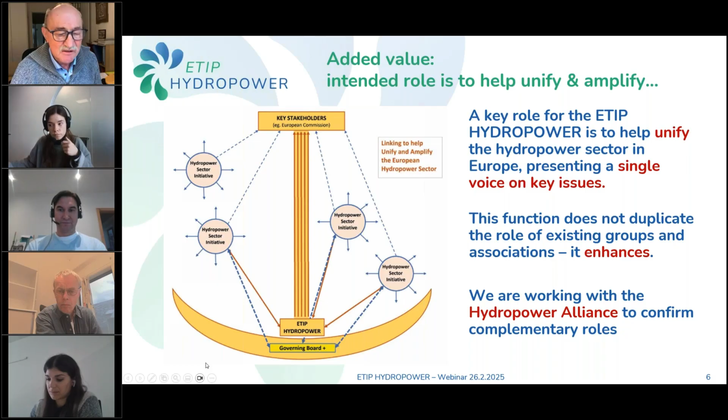ETIP Hydropower has been active for almost 2 years. We have an operational structure in place, the secretariat, an industry-driven governance with all stakeholder sectors, and a widely open scientific advisory board with 26 members. You can see some names here.

I am chairing, or coordinating the project from the scientific point of view. We have a governing board chair, Denis Aelbrecht, and governing board co-chairs Antonella Frigerio and Peter Stettner. I think perhaps some of them are online with us today.

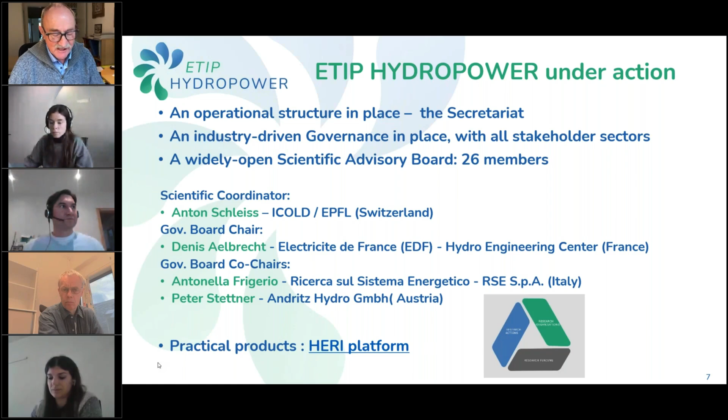We have established the so-called HERI platform, which gives information on ongoing and already finished projects at the European level, but also at the national level. The structure of this platform is ready, and you can see it on our website. We are still working to gather much more information than we already have, convincing more people involved in projects at the national level to share information about their work.

We have 4 working groups, and we are very satisfied with the huge motivation of many people to participate. One group focuses on hydropower's role for flexibility and storage, a second on hydropower and biodiversity, a third on hydropower and climate change, and a cross-sectorial working group which wants to promote and disseminate uptake of past and current European R&I projects, which is the purpose of this webinar today.

First results of these working groups will be presented during our Hydropower Day on 8th of April, which I will show you on a slide at the end.

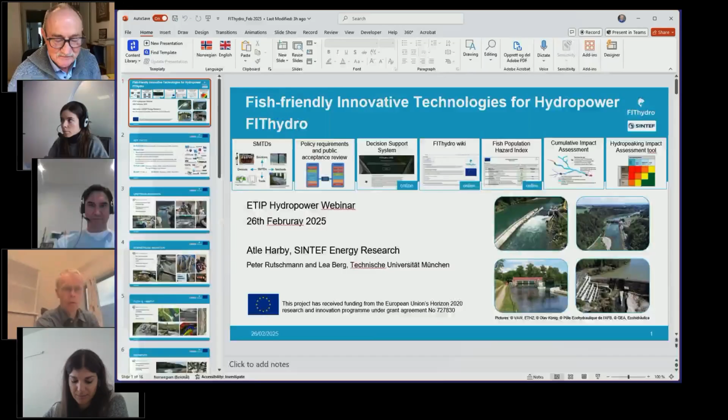Thank you very much. Let me see if I can present. I think so. I'll just share a window. Yes, sorry, okay. Are you seeing my slides now? Yes, we see them.

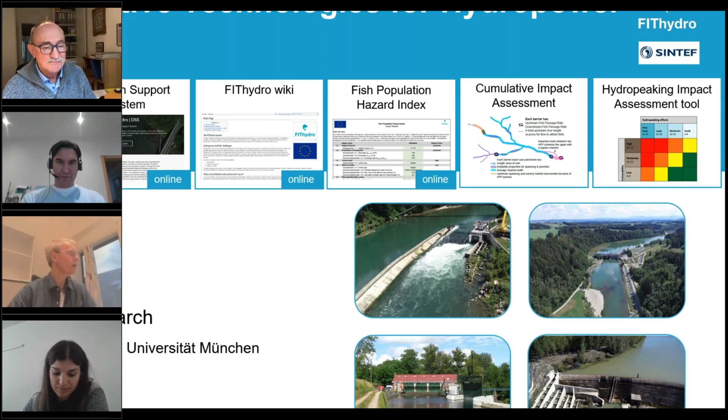Okay, thank you. I will present the FIThydro project, an abbreviation for fish-friendly innovative technologies for hydropower. I'll go briefly through some of the key elements, findings, and results, which are now widely used. We had 26 partners, half from research and half from industry, representing 10 countries. The goal of FIThydro was to develop cost-efficient environmental solutions for hydropower while maintaining or even improving hydropower generation, trying to improve both environmental conditions and generation. We presented many decision support tools and what we call solutions, methods, tools, and devices. We had test cases around Europe in several countries to apply and test these innovative solutions. The budget was about 7.2 million euros, plus at least 20% extra as own funding among partners. The project was supposed to end during the COVID period in late 2020. We hoped to have a final seminar in person, but that was quite difficult in 2020 and 2021, so we ended up with a webinar as the final solution. But there's a lot left from FIThydro, which I'm going to show you now.

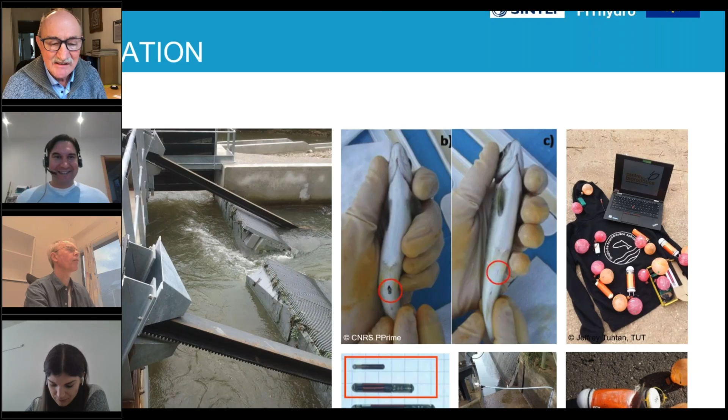I don't see what you see, I just see my screen. For me it's actually the same. If you can zoom out the presentation a bit, perhaps put full screen or go out and put full screen again. What about now? Now it's perfect, so we can see all the fish. That's important.

We used to use GoToMeeting and GoToWebinar all the time during FIThydro. It was a very good tool, so I was used to it then, but since then we only use Teams, so I'm sorry if I'm unfamiliar with how to use it.

This one you need not see perhaps, but I'll skip that one anyway, I told you about it. I think that's okay, we saw the important part. It's perfect. And this one you see the full screen from a little photo of an entrance to a fish ladder in the lower end. Yeah, good, okay.

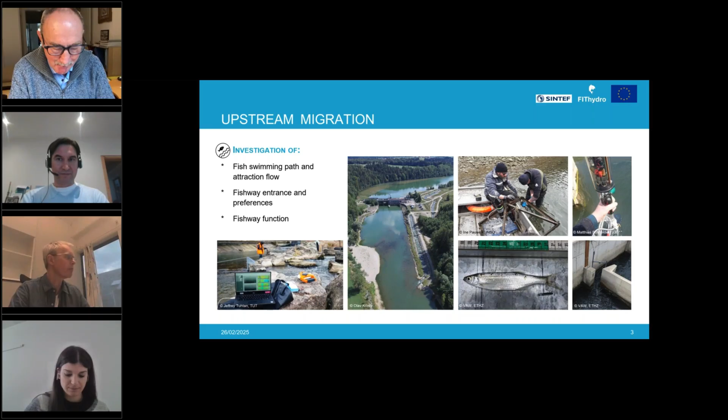So it's going to be some photos of what we did, and you also see some devices here and people mounting things to track fish and so on, to actually look into the challenges of making sure that fish can pass upstream and also downstream, which is maybe even more difficult because most of the flow has to go into the turbines, and we have to get the fish to go somewhere else.

To not be chopped up, so to say, inside the turbines. So I'll come back to some of the devices we developed to do this, but we had a look at guidance efficiency and attraction to the bypass, and also looked into what would happen to fish if they actually pass through the turbines.

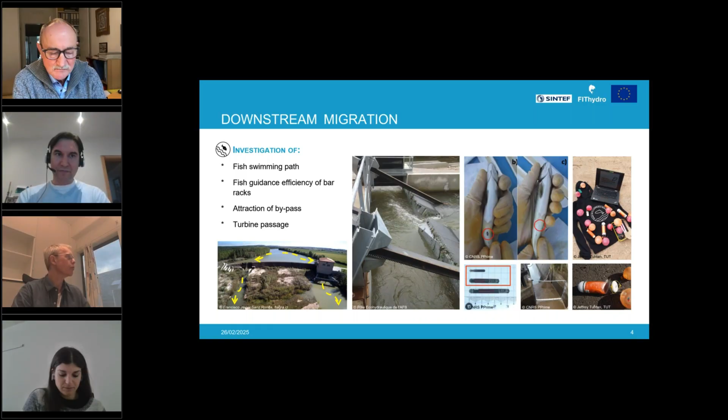Other challenges with hydropower and fish is, of course, that we modify the flow and hence impact their habitats, both all kinds of habitat for spawning, for rearing, for adult fish, and how it's distributed, and how much water we deliver to the bypass reaches of hydropower impacted rivers are quite crucial.

So we did both modeling and also field work to actually test spawning gravel, or to see how habitat conditions change with flow. We also had a special focus on hydropeaking, I'll come back to that as well.

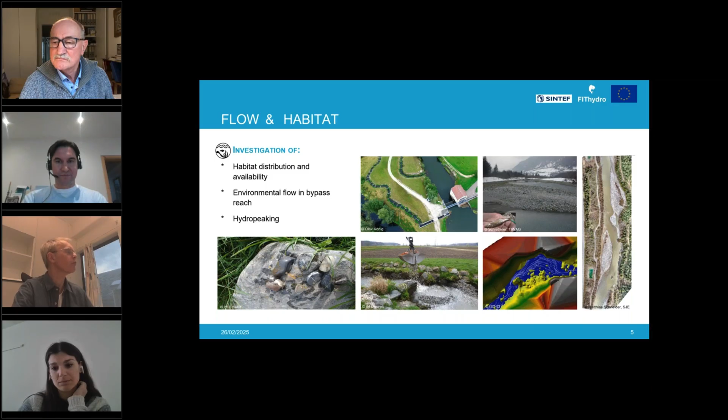We also had a little bit of focus on sediments, because we all know that dams also stop sediments and block it, which will eventually have a large impact on the downstream river and downstream fish habitats, maybe changing the substrate conditions and so on.

So we also looked at solutions to make sure that the geomorphological processes keep on going as they should be. Okay, that was a little overview of the main challenges with fish and hydropower.

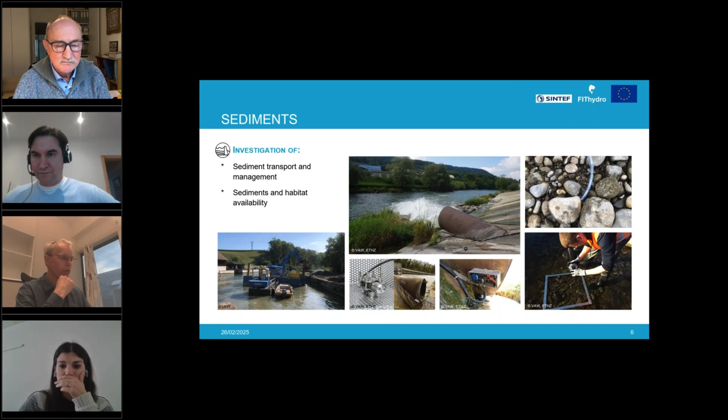And I'll explain some of the tools and methods we actually developed in FIThydro. You see here a long list of solutions, methods, tools, and devices that can help investigate how the conditions are at hydropower plants and look for solutions.

I'm not going to explain all of them because that would take too long, but you can read about all of them in the FIThydro wiki, which is still working. It's an open access online platform. It's not really a wiki in that everybody can edit it, but those who were members of FIThydro could. We have divided this wiki into the main challenges, like I showed you just now, on habitat and e-flows, upstream and downstream migration, and sediment.

So you can enter the wiki in many ways. If you have a challenge or think you have a problem, you will find the tools and methods you can use to investigate, find out the problem, and solve it with mitigation measures. It's a systematic built-up wiki or web page where you can find a little bit of information, and if you click further down you'll find more, and you can link to references and hopefully even find the contact persons that actually developed the tools or took care of them.

These will help in the whole phase of hydropower development and planning, implementing, maintaining, and monitoring these measures to see their success rate and so on. And all of these solutions, methods, tools, and devices were tested in different test cases of FIThydro. Some of them were also in a prototype status before we started FIThydro, and some have even been developed a little bit further after FIThydro, but they are live solutions.

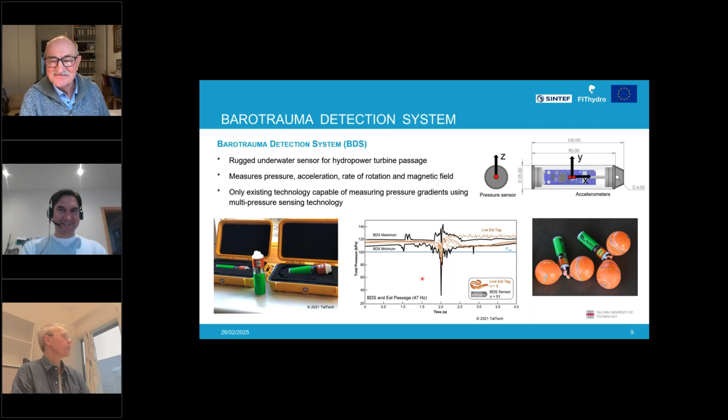Another thing we did was through a lot of laboratory studies, we developed this curved bar rack bypass system. It was developed by ETH, and it provides better solutions to guide fish to the right bypass instead of getting them into the turbine, with better efficiency on the fish and with less head loss. That was kind of the main advantage with this system, and we actually proved that it has 4 times lower head loss compared to the normal shape.

The normal shape of the bar rack in front of turbine intakes, and it has been tested with different fish species as well. So it's quite impressive performance and suggested to be used. I think it's now installed somewhere.

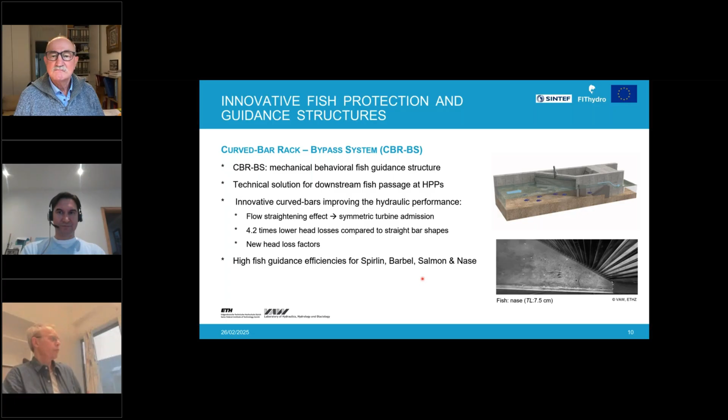We had from beforehand a lot of focus in several countries and national projects on hydro peaking impacts from power plants that are turned on and off, leading to rapid changes of flow in the downstream river. So we developed a framework, which we call the hydro peaking impact assessment tool, which can use either flow records or synthetic flow records, field measurements, or modeling to describe the physical conditions, and hopefully also fish population data that can tell you how vulnerable the fish population is.

This tool investigates rate of change, ratio, frequency, and timing of water level and flow fluctuations, and also the changes in habitats, to give you, combined with the vulnerability of the fish populations, a score on the impact, like you see on the right-hand side here, where you combine the effect of the peaking and the vulnerability of the fish.

And the goal of this is, of course, to try to do things that move you from the upper red left corner down to the green corner, where hydro peaking would have a very, very small impact.

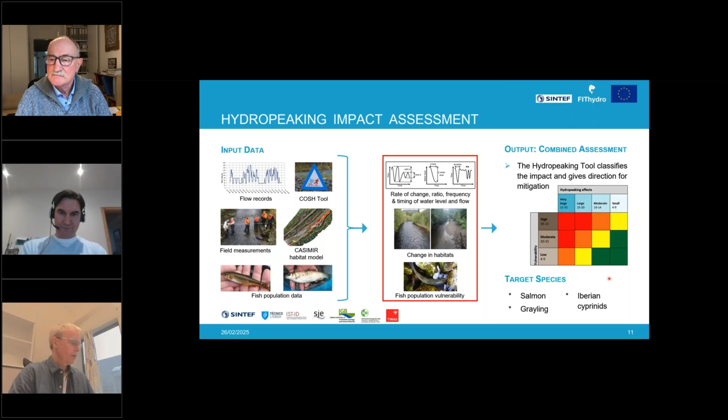We also made several decision support systems, or systems to help make decisions. It's kind of a screening tool, evidence-based decision-making to find the mitigation measures and first of all the impacts on fish. It's a screening tool on a more high level to find out what are the potential risks and how to make decisions on what to focus on to improve conditions.

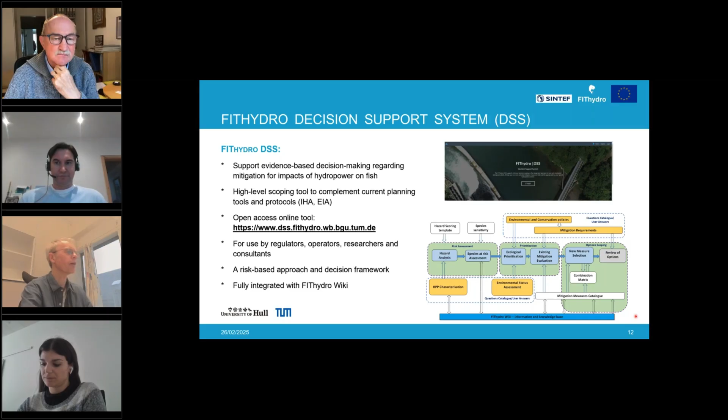So it's an online tool that is still alive. From the diagram, I'm not going to explain it all, but it has several inputs, mostly from research done in FIThydro, to find your way. It's also linked to the FIThydro wiki, so you can really find what the tools and mitigation measures should be if you have this or that problem.

Another tool, which is a bit similar but simpler, addresses fish hazard and risks of turbine passage, upstream and downstream migration, and flow alteration that may impact fish. It gives you a risk score, and if it's a high risk score for fish species that are very sensitive, as shown on this graph, combined with high hazard, it shows where you should perhaps do more investigation to solve these problems.

The input data you need are some specifications on the power plant, flow measurements, flow statistics, and information on where fish can move downstream and upstream, the facilities involved, and of course some fish data.

This is developed as an Excel tool, which is available for anyone, and it gives you a score shown with green and red indicators. For each fish species you'll see green, red, or yellow indications, and you should go look more into the red ones. That's where you can focus your mitigation measures.

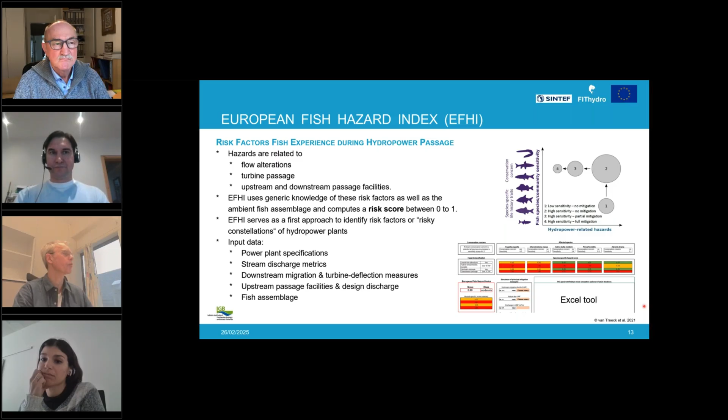We did not only look into technical things, we also looked at social acceptance of hydropower and policy requirements. We did a survey and review of national policies in several countries. This was quite fresh in 2020, and there may have been changes since then, with things happening fast like the Renewables Directive, the EU taxonomy, and nature protection efforts in Europe. Still, we did work looking into not only the Water Framework Directive but also other national policy requirements.

So I'm soon about to wrap up. The idea with FIThydro was to provide solutions, methods, tools, devices, policy requirements, and effective tools that can be used for planning and design to make hydropower more socially acceptable and environmentally sustainable. I think making these tools available also makes it necessary to do some training or adaptations in each country.

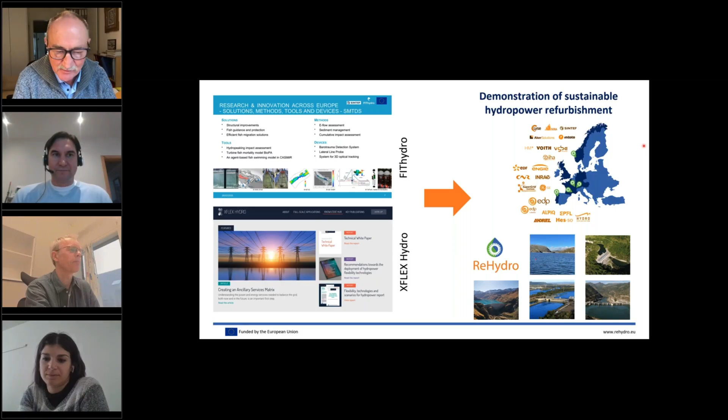So I remember very well, just before the lockdown, there was a workshop you organized on the wiki of FIThydro, January 2020. I think that was the last time I traveled before the lockdown started. So I remember very well the FIThydro project because of that workshop, which was very successful at that time.

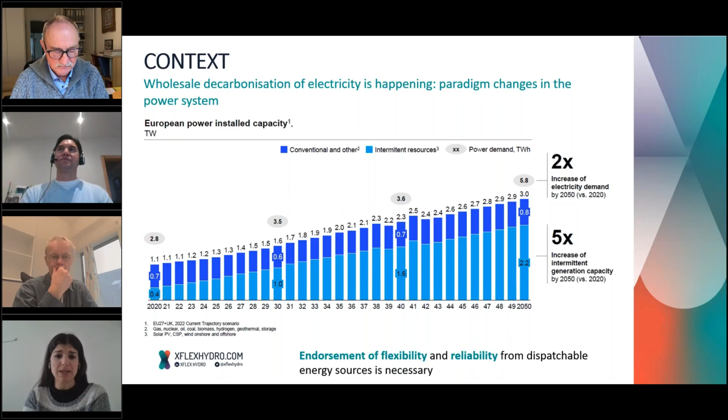There is also an expected increase of intermittent generation capacity, namely from wind and solar, to meet renewable energy targets, 5 times higher in 2050 relative to 2020. In this context, there is a strong need to endorse flexibility and reliability of controllable sources such as hydropower, which can provide energy flexibility and power flexibility to the grid, ancillary services, and storage capability for long-term flexibility.

In this context, our X-Flex Hydro project targets innovation and demonstration activities over 4.5 years, in order to develop new technologies and integrate them into existing and new hydropower stations, to demonstrate that it is possible to strengthen hydropower flexibility while keeping reliability of the technology. X-Flex Hydro gathered together 17 partners from both academia and industry to develop innovations, demonstrations, and deployments of those solutions.

These are the main steps of our project, started in 2019 and concluded in February 2024: first, drawing what are the flexibility requirements and capability of hydropower; then understanding how smart solutions, targeting for instance digital tools, can improve hydropower flexibility, shown in 6 demonstrations across different kinds of hydropower stations worldwide—pump storage, reservoir storage, and run-of-river power plants; and finally, how to deploy those results, drawing roadmaps and guidelines, and analyzing market uptake potential and dissemination.

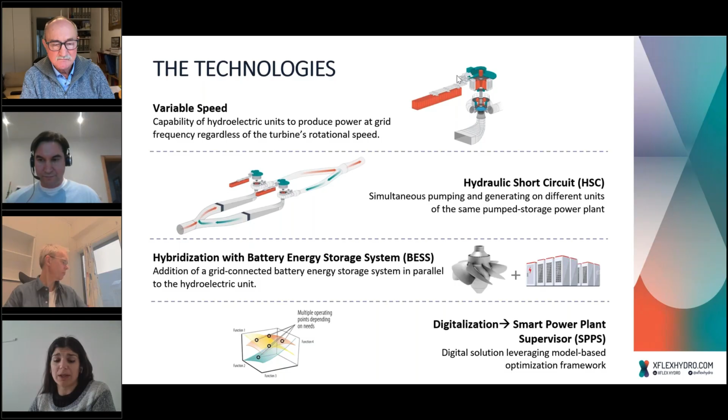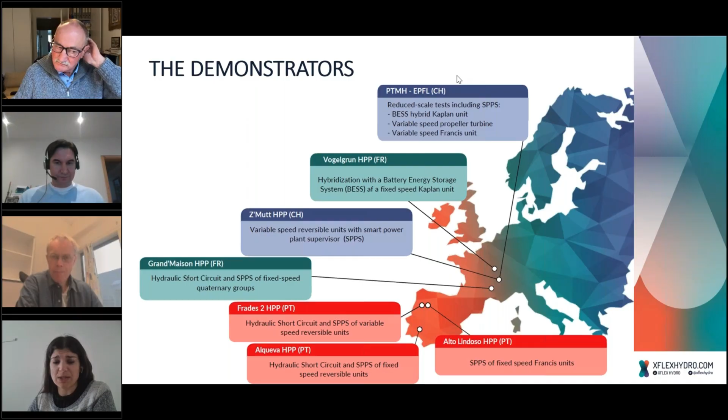These solutions, depending on the specific case study, were demonstrated in 6 demonstrations, plus in our laboratory at EPFL, at the technology platform for hydraulic machines, where we had 1 test rig for preparing and fine-tuning those technologies before full demonstration at the plant.

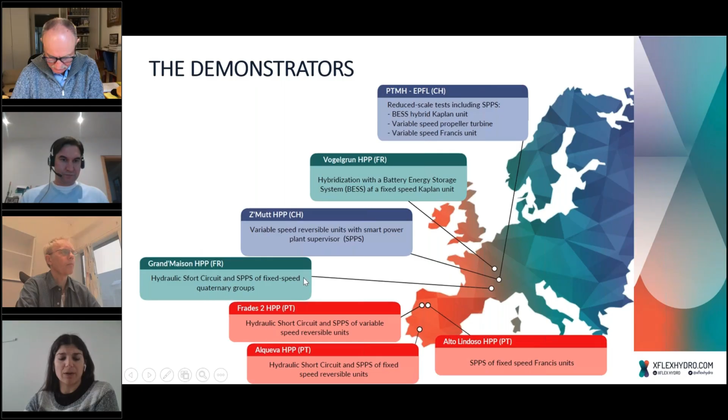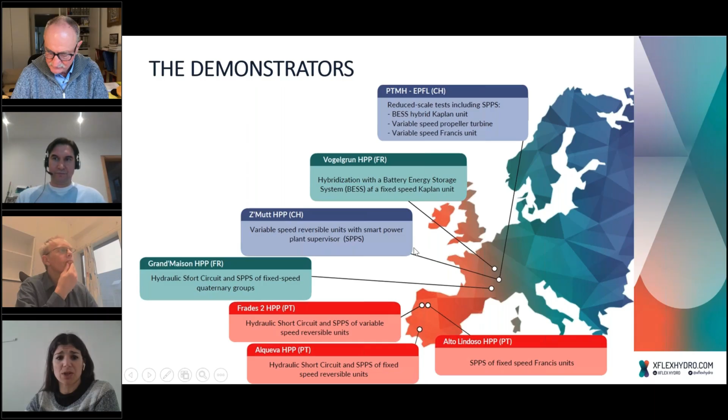We had 3 demonstrations in Portugal: a storage hydropower station and 2 pump storage power plants featuring reversible pump turbines. 2 demonstrations in France: Grand Maison, a pump storage power station with Pelton units and reversible pump turbines forming quaternary groups; and Vogelgrün, a run-of-river plant with Kaplan units and a battery, now in operation. And 1 demonstration in Switzerland: Z'Mutt, with reversible pump turbines and full-size frequency converter capabilities.

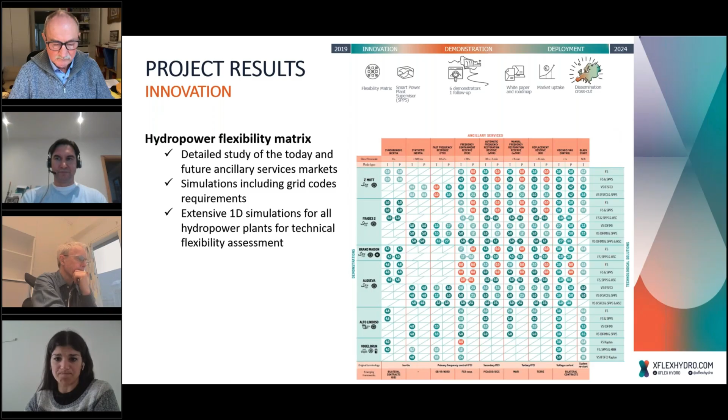The other major result was the development of a digital tool, the Smart Power Plant Supervisor, that was successfully installed in all demonstrators. This is an optimization tool that allows the use of meta models built on simulations, numerical simulations, and experimental tests at both reduced scale and full scale, in order to define a health index and optimize operations of units based on real-time evaluation of that health index.

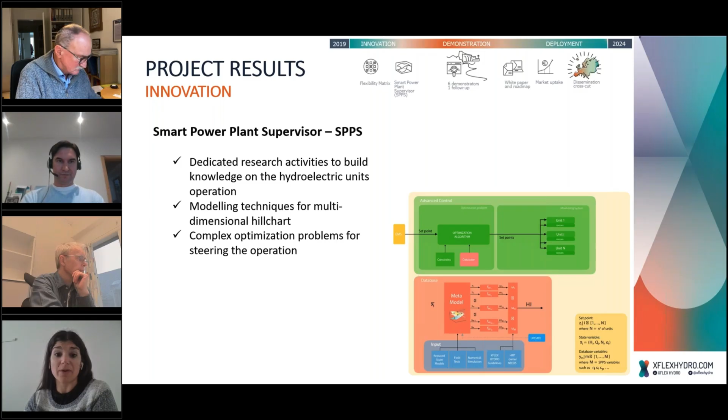Both modeling techniques and optimization algorithms have been published, so they are open source, and each manufacturer has developed their own proprietary solutions to be exploited on the specific demonstrations. This also led to commercialization of the project results.

Going to the demonstration, first for pump storage power stations implementing hydraulic short circuit, this was demonstrated in Alqueva, Grand Maison, and Frades. We have three different demonstrations because each one has features and particular capabilities. For instance, Frades was particularly interesting to study how variable speed with a full-size frequency converter plus a hydraulic short circuit could achieve a full extension from negative power to positive power and vice versa without stopping operation.

Also by performing fast changes in modes, so for instance we achieved to demonstrate that it's possible to change and switch from pump to turbine mode in only 70 seconds for a machine of several hundred megawatts.

In Grand Maison, we had Pelton plus reversible pump turbines, so quaternary groups. Here also, thanks to the hydraulic short circuit and fixed speed machine, we were able to significantly raise the capability of regulating and pumping mode into these power plants. Here, for instance, you can see the operation since September 2021, when this was put into commissioning, and the extension of the operating range was reached in the first 6 months of operation.

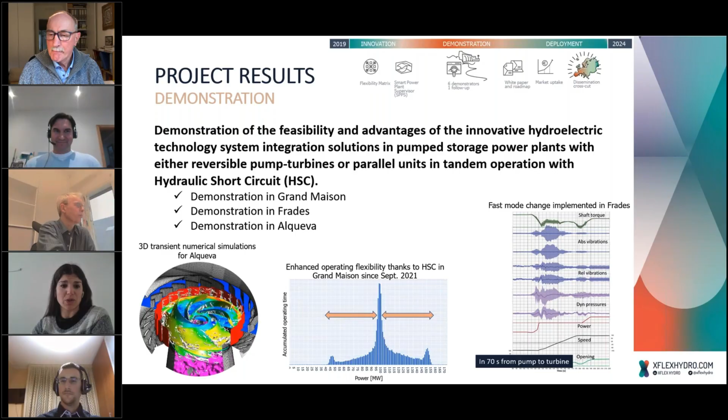For what concerns the integration of technology solutions with low capex solutions in storage hydropower stations, it was successfully demonstrated that by only implementing the Smart Power Plant Supervisor, we were able to fully extend the operating range up to almost a few percent at deep partial load for those Francis turbines.

So thanks to this digital tool, which is now fully operational on site, the operator knows the risk they have when operating at partial load, deep part load, raising the damage. They know the performance, and so they can evaluate and support the decision of whether they want to participate in markets at such stretched operating range at partial load.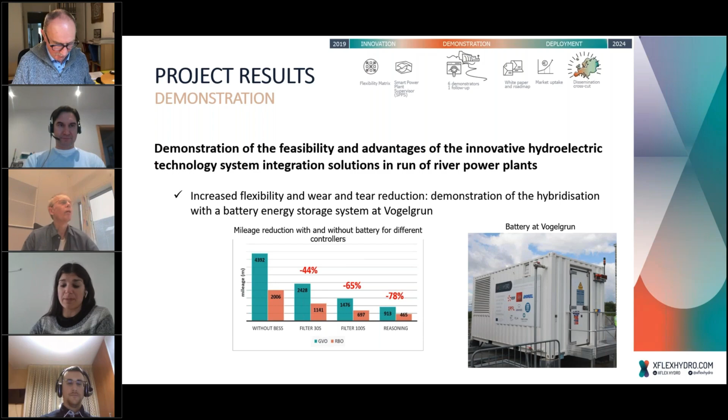That was an overview of the technical results from the activities developed in the project. As you might remember, there have been innovations, 6 demonstrations, and a phase of deployment. So in the next slides I will show briefly how we performed this deployment and which tools are available for further deployment and use of the results beyond the duration of the project.

First of all, we drew up a technical white paper, which is free. You can download it on our website, where we detail how we developed these technologies, how we implemented them on site, with all the different specific activities we required to achieve results.

We also have a roadmap and recommendations document for the industrial deployment of those technologies, focusing more on market aspects and policy aspects for the use of such technologies. Both documents are publicly available on the website of the project.

Overall, if we want to draw guidelines from the results of the project, these two documents provide guidelines specified by kind of hydropower station in order to set a first indication and roadmap about the modernization of a given plant. For instance, for pump storage power plants, here are the different considerations we made and the applicability of a study we could ensure within our project framework.

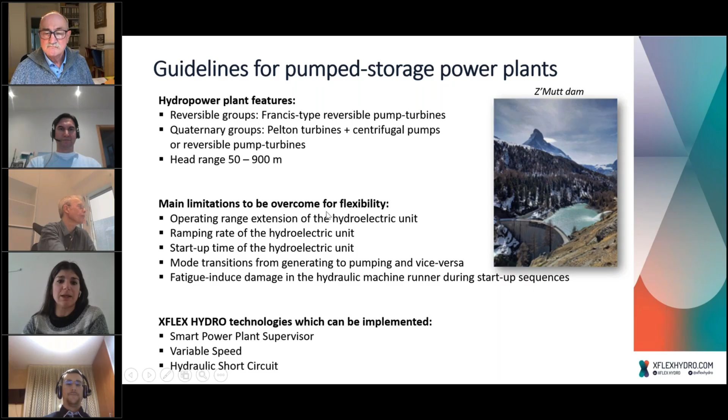Here we have the different possible solutions that can be expected, which are needed to overcome flexibility issues. And here are the different hydropower technologies that can be implemented to support and succeed in overcoming such issues.

For instance, in Z'Mutt, which I mentioned before as a full-size frequency converter new unit, reversible pump turbine, one of the major issues was how do we fully exploit variable speed beyond simply being able to change speed, actually compensating head variation and having more efficient operation at different head values relative to the nominal one.

What we studied was mainly how we can leverage variable speed in order to find the path during the startup sequence that minimizes damage. Here you can see all the possible trajectories we investigated, respecting the plant conditions, the water hammer limits, and the penstock and hydraulic layout limitations.

And here you can see, within the characteristic curve of a machine, which kind of performance and target operation we are talking about.

By putting together 1D numerical simulation, 3D numerical simulation, and validation on our test rig, plus validation and demonstration on site, we were able to find paths and trajectories for startup sequences. We can now tell new potential plants how to realize startup sequences in the order of less than a minute, with damage up to 15 times lower compared to a standard startup sequence employing synchronization with the grid, as in the case of synchronous machines.

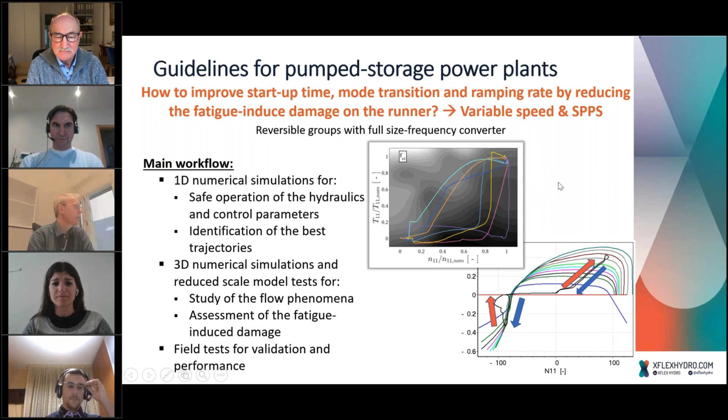How did we try to evaluate and quantify this extension of flexibility? You might remember at the beginning of my presentation I showed you one of the innovation parts, which is evaluation of how different technology can provide ancillary services in terms of participation to ancillary services and related markets.

We did a similar evaluation, but this time by evaluating key performance indicators. We identified the extension of operating range, the response time, the ramp up and down, the need of maintenance, the plant efficiency, and the digitalization level of the technology required. This was evaluated for fixed speed, but also for all the different technologies implemented at each site.

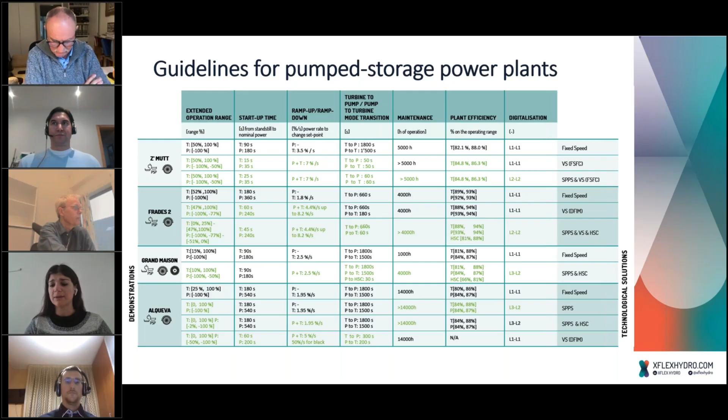So you can see the results of such an evaluation of the key performance indicators for the pump storage power plant. We did the same thing for storage power stations, studying only Francis unit power stations in this case.

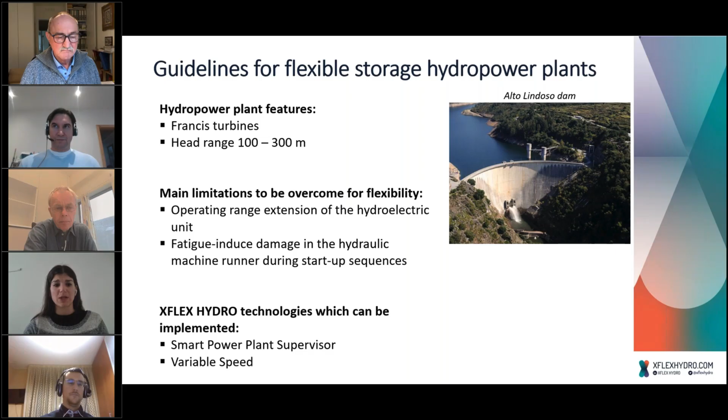Same thing for run-of-river power plants - here the applicability, the challenges that must be overcome for flexibility, and the possible technologies that Xflex Hydro proposes as a solution, and which kind of improvement each technology can provide for flexibility performance.

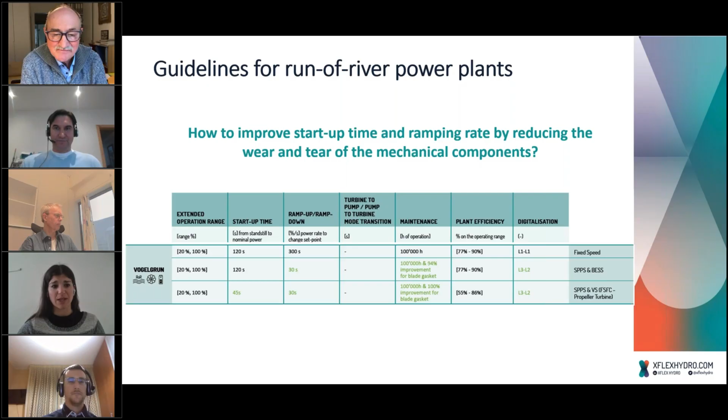I went quite fast - that's mainly because I invite you to download the technical white paper and see in detail why and how we can achieve such results by implementing each of these technologies in a specific scenario, in a specific hydropower plant with similar conditions.

This leads me to my last slide with the major takeaways. Xflex Hydro proposes several technological solutions that can be adapted to all kinds of hydropower stations, and their performance can be assessed through the ancillary services matrix in terms of performance in the markets, and key performance indicators in terms of how flexibility can be improved.

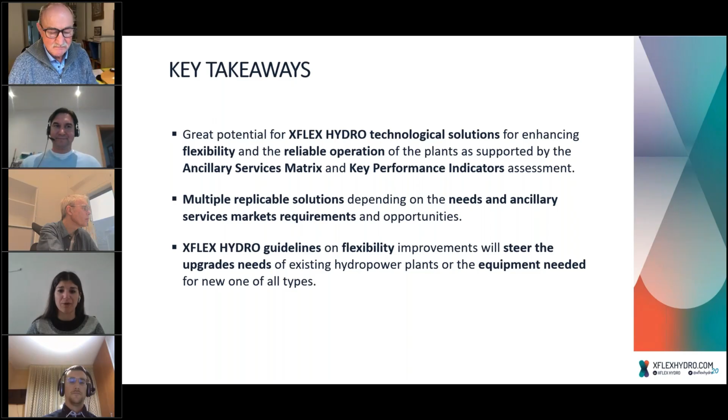These are flexible solutions that provide, depending on the needs and the ancillary services requirements and opportunities, new scenarios and new venues for hydropower exploitation. Guidelines for flexibility deployment are provided by the project, and we hope to see new projects and new power stations following such guidelines for new equipment and modernization.

So with this, I thank you very much for your attention, and I'm looking forward to your questions.

Thank you very much, Elena, for this very detailed presentation. I remember also the very successful workshop you had - it's now, I think, just one year ago. Exactly, it was exactly one year ago. There were a lot of interesting presentations and a huge amount of discussion, also with people from the practice. So I think this is also a project which has quite a significant impact now in the hydropower sector regarding flexibility.

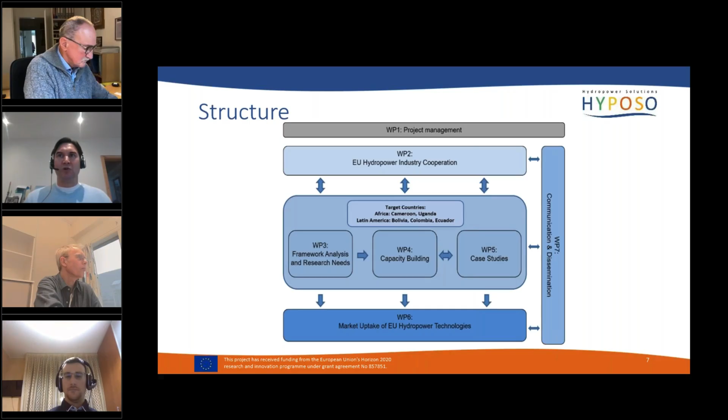We set us as well some impacts and numbers. So for installed megawatts in all the target countries, we like to trigger off in total 90 megawatt, which in theory would then amount to an additional EU investment in these target countries of 136 million US dollars, according to our calculations.

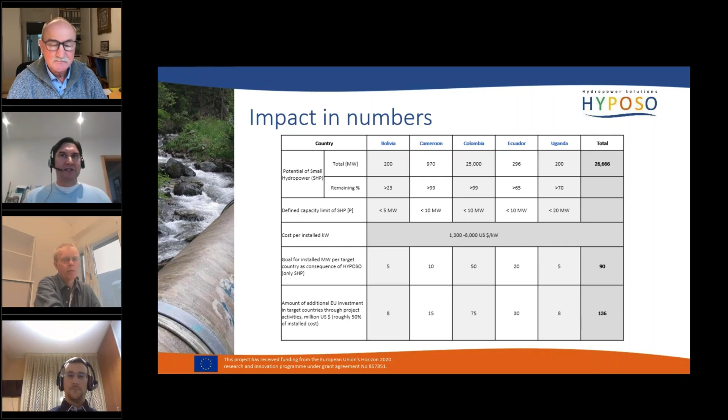And of course, in the countries, we like to contribute to different objectives, increase the rural electrification, for example, in Bolivia, in Cameroon and Uganda as well, but there also the urban electrification has been an issue. And in Colombia and in Ecuador, the increase of the share of renewables was the objective, either putting out the coal in Colombia or replacing the fossil oil in Ecuador.

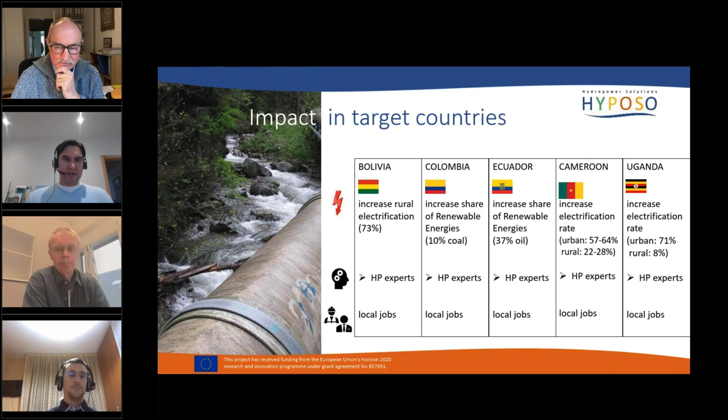And of course, with the activities, we also like to make the pool of hydropower experts bigger in the countries. And once these projects that have been looked at should be realized, then of course this will lead to more local jobs.

Thanks to the colleagues from FIThydro, we also have had some support from them, and we have one chapter from the FIThydro project in this handbook. So you find information about small hydropower systems, overview of hydropower system components, the development process, and also, importantly, the project finance for international small hydropower projects.

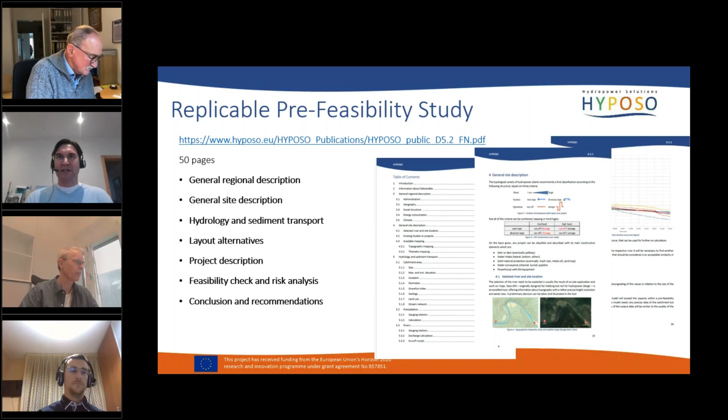However, we also like to have one replicable pre-feasibility study. This is an extra document, and you can find here the link to download it. This replicable study is a 50-pager containing general instructions on how to make a regional description, site description, how to address hydrology and sediment transport, layout alternatives, project description, a feasibility check and risk analysis, and at the end, some recommendations.

The last tool that we have developed is the so-called Hyposo map. So now I will share my screen and showcase the video.

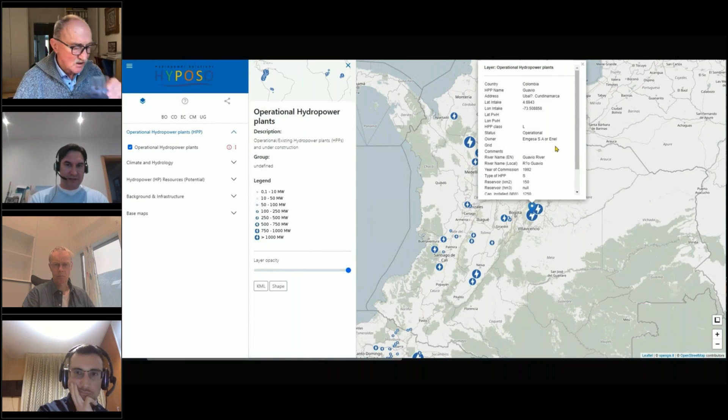Okay, here we go, so now we just jump into the Hyposo map. You can see several layers, altogether more than 40 layers that can be viewed and combined, across 5 main categories: operational hydropower, climate and hydrology, hydropower resources, background and infrastructure, as well as base maps.

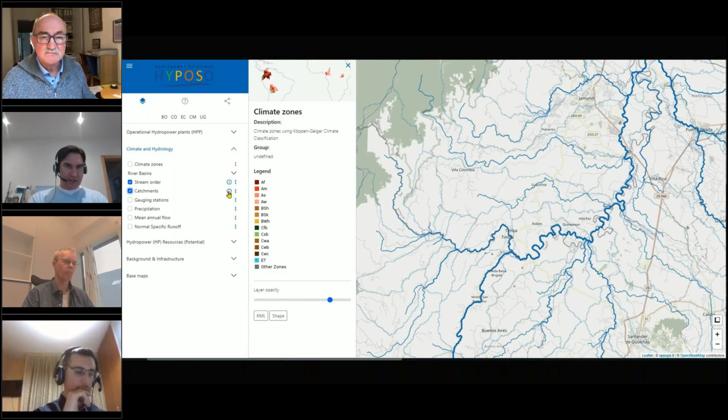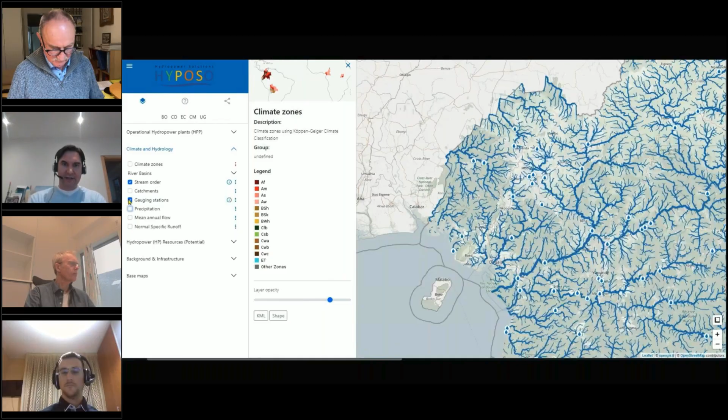You can have a look at different layers on the maps, gauging stations, and this is relevant information if you like to develop hydropower plants. Also where the transmission grids are located, and other key information. You can see at the top left that this is available for Bolivia, Colombia, Ecuador, Cameroon, and Uganda.

It's of course very quick, but just giving you the impression of what can all be done with this tool. This was basically the information about the mean annual flow, I think. Now it's going on with, I think, the catchments or the climate zones. The cursor is still looking for the next function, but should be there in the next seconds.

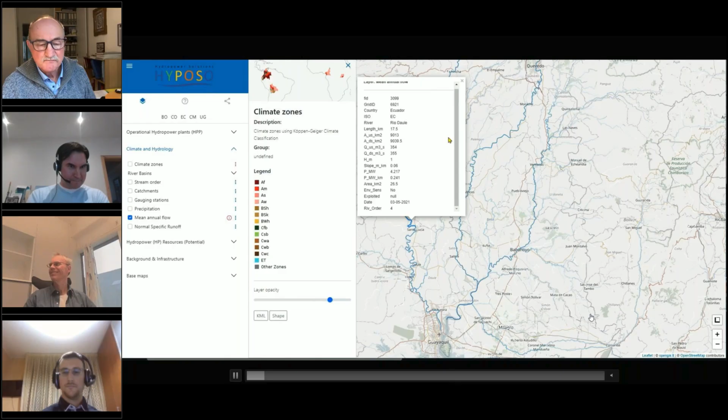Can I go forward or should I stop? It should be okay, actually, now it's going. Okay, it's moving again.

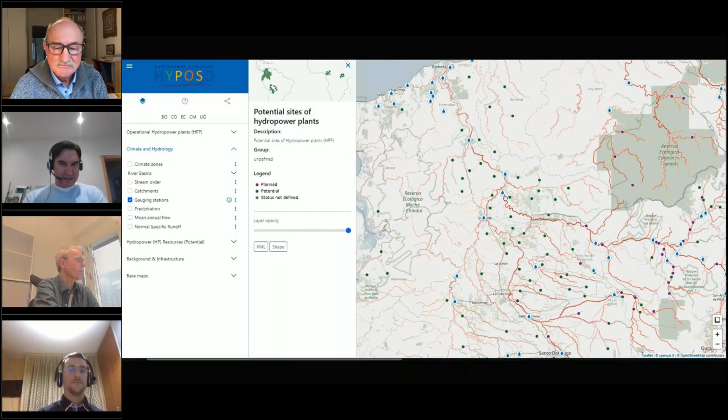So basically, here you can see these mentioned 2,500 potential hydropower sites, together with their key datasets, shown on the map. By clicking on them, you find more information. As I said, the protected areas are important to be considered, and the gauging stations in combination give the best information for planning plant development.

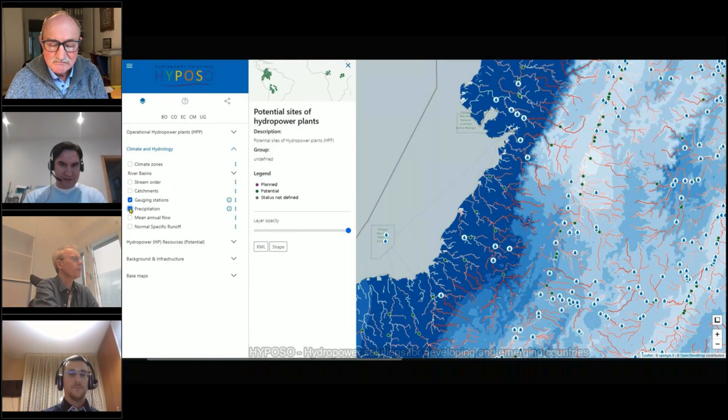In addition, of course, there's the precipitation data, plus different kinds of maps that can be displayed. That would be in short the Hyposo map. Now I think I need to regain the screen, and I will give you now the access.

For further information about the Hyposo map, here's the contact of one of the masterminds behind it, from Lithuania, Linas Jurevicius. Feel free to get in contact with him if you want to find out more about this tool.

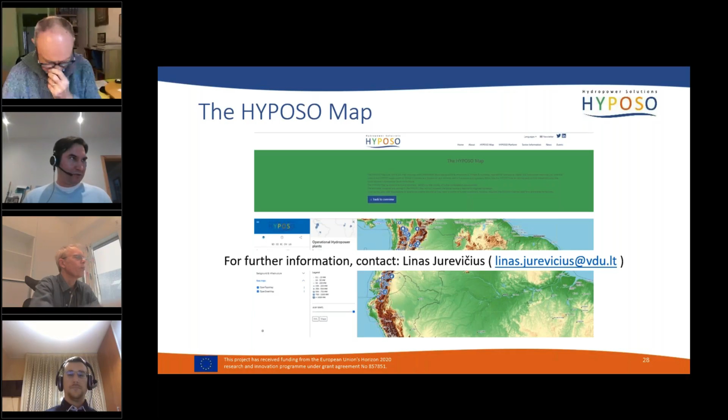And not to forget, we also carried out framework condition workshops in our 5 target countries that led to policy recommendation papers that are available. For the 15 cases, a financial assessment is also available for download, and if you're interested, some videos to look at as well.

Finally, from our Hyposo friends in the countries, I got some messages, for example from Cameroon: the funding of the selected 3 projects is still a major issue, so you're invited to have another look at the studies for the sites in Cameroon. Our colleague from Cameroon also highlights that dissemination of the untapped hydropower potential should be given much more importance in his country.

into the Hyposo map. From Colombia, I was in contact with the site owners of the potential plant named Palace. These site owners are looking for receiving either offers or support, and think that a third party to develop the project would be best. Please, for further steps, contact Mr. Gomez Echeverri.